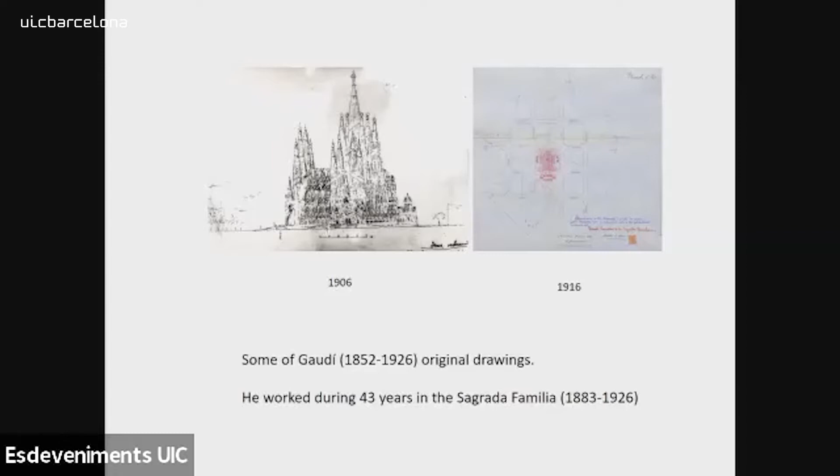He defined the building's general design through drawings and descriptions and set out the construction program so that he himself could turn the endless possibilities into reality by building one of the three facades, the Nativity facade.

In this way, he invited future generations to do the same on other parts of the building, which he specified in the form of drawings and large plaster models.

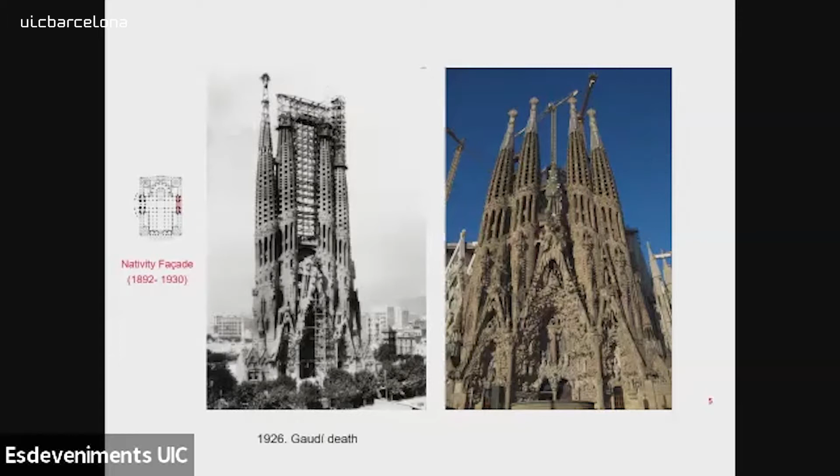His disciple successors built the towers of the Passion facade, while the interior nave, the crossing, transepts, and the apse were built between 1986 and 2010 under the direction of Jordi Bonet.

Over the past several years, we have worked to complete the sacristy, and now we are building the six central towers, the first of which, the Mary Tower, was finished last year.

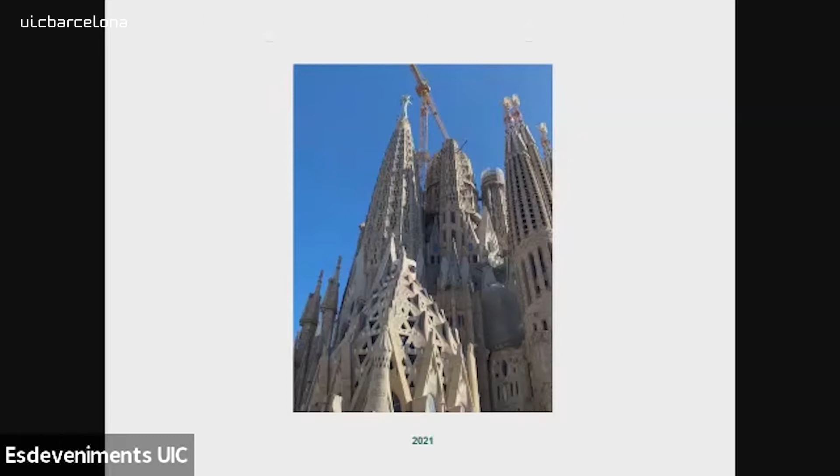The process of turning the plans of each part of the church into a concrete reality has always depended on the information of Gaudí's original plan. When we have the original plaster model or detailed drawing, the process was to study in depth before building, to understand the laws and method of design that were to be used in other similar parts of the building.

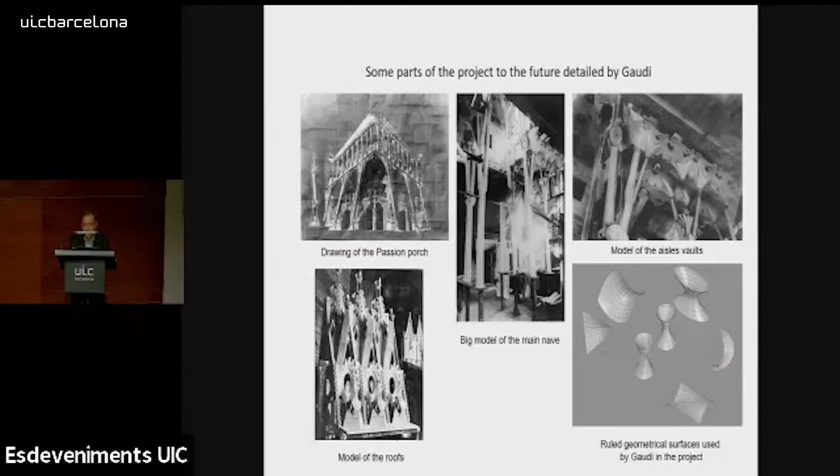Computing technologies have been a very important tool to make the entire process possible, above all because he designed the project to be built in the future only with geometries that exist in nature, but which no architect had used in their projects before.

Making detailed models based on rules and the same method was the system that Gaudí created to transmit the detailed design which he intended to communicate to his successors. He proposed that the rules and the design method of the plaster models could be applied to other similar parts, defined in his drawings and descriptions, but not detailed in models.

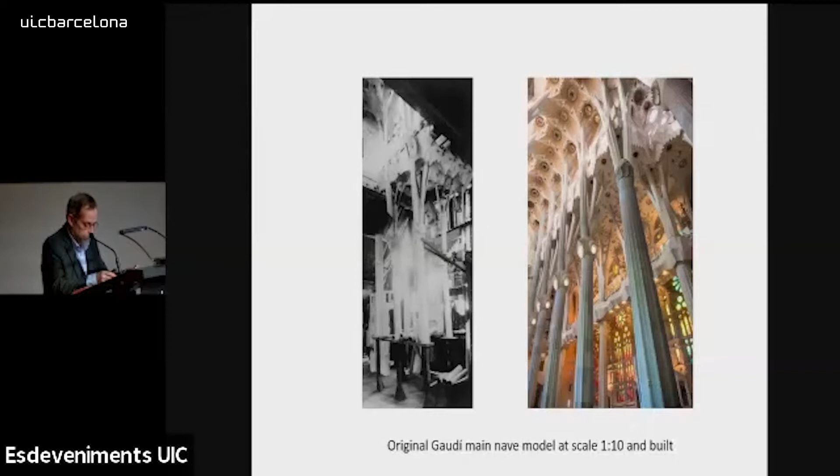Building the Sagrada Familia has always been a challenge. Today, it necessitates the use of the most cutting-edge design and construction technology, which has required analyzing and learning what contemporary technological construction can give us to build the Gaudí project.

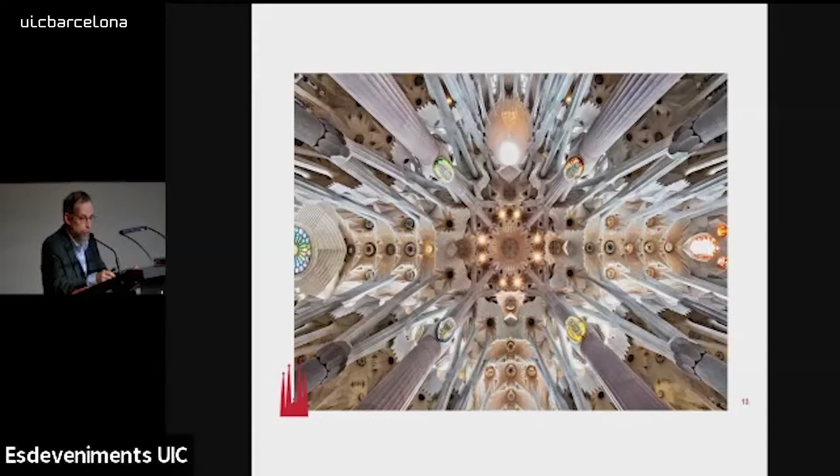In turn, contemporary technology, and I am speaking principally of digital technology in relation to drawing and structural calculation, has contributed immensely to new qualities and developments of the project.

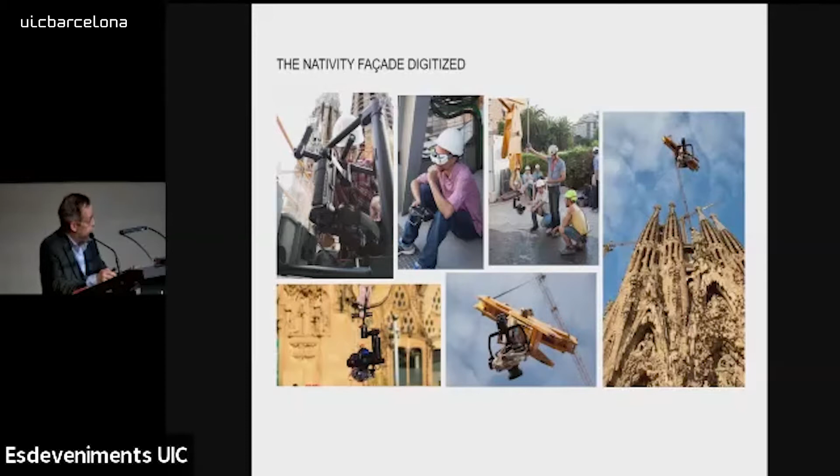The new technologies also assist the task to preserve the heritage. The Nativity facade has been digitized with a scanner and photogrammetry, obtaining 2 millimeters of precision.

First part, the study of the original Gaudí project today. We have the data of the original project in different forms: in published drawings, in the original models, the models restored after the destruction during the Civil War, photography of the original models, the pieces conserved, and also in word descriptions.

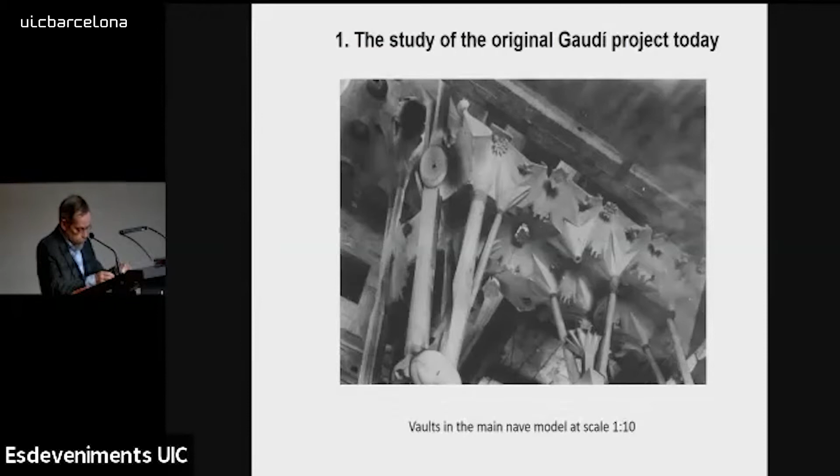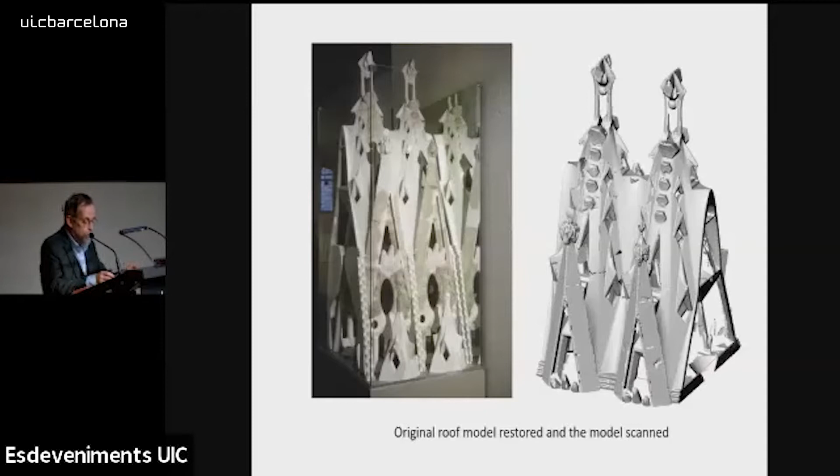Gaudí left a model of the glory facade, the main facade. The pieces scanned were built virtually. The digital photography restitution allows us to analyze the photograph of Gaudí's original models and to complete the information of the remaining fragments of the models.

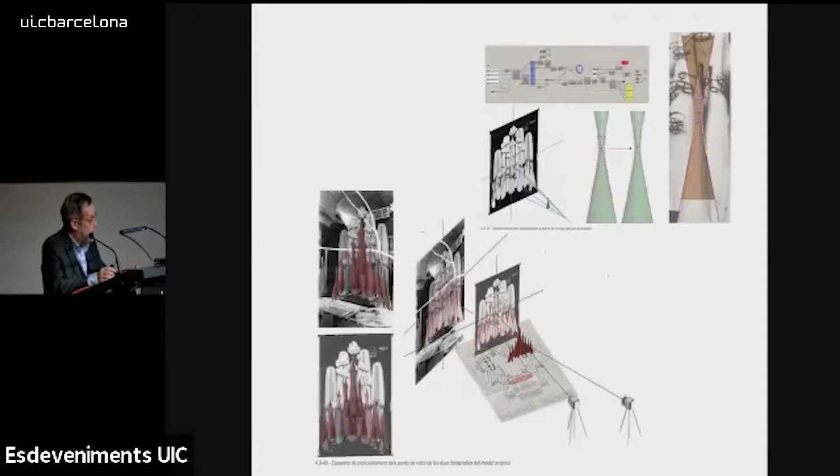We can thus obtain the proportions and dimensions of the geometry and be as faithful as possible to what Gaudí had proposed.

The printed 3D physical models, also with plaster like the Gaudí models, is the verification of the digital models. We print physical models for the verification of the digital models. This information is completed with virtual reality.

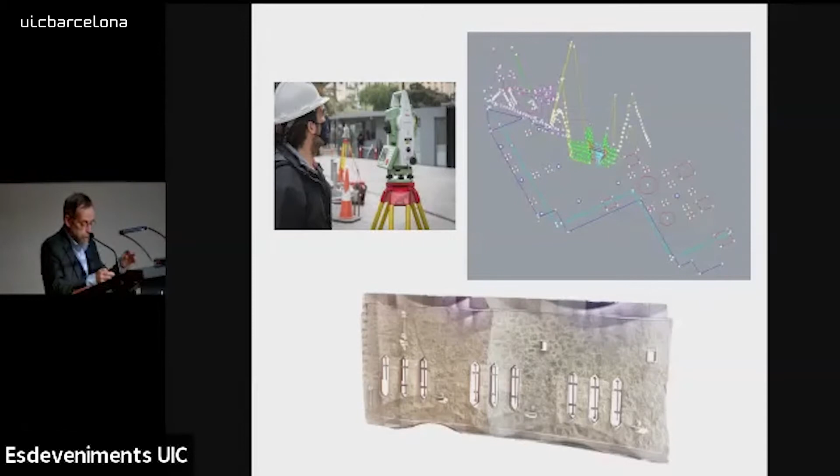During the construction, topographic digital systems allow us to control the situation of the elements already built and the correct placement of the construction elements.

The central towers, example of parameterization. The project of the 6 central towers: the central tower of Jesus Christ, the 4 Evangelist towers, and the Mary tower above the apse.

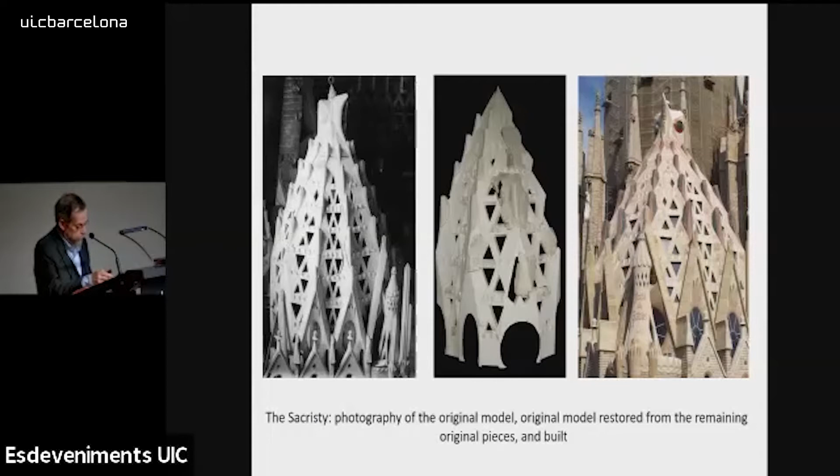The 6 towers located above the walls of the crossing and the apse are related to the dome of the sacristy, which Gaudí left in a detailed plaster model. The sacristy was a testing ground for the towers, both based on the same concept: the intersection of

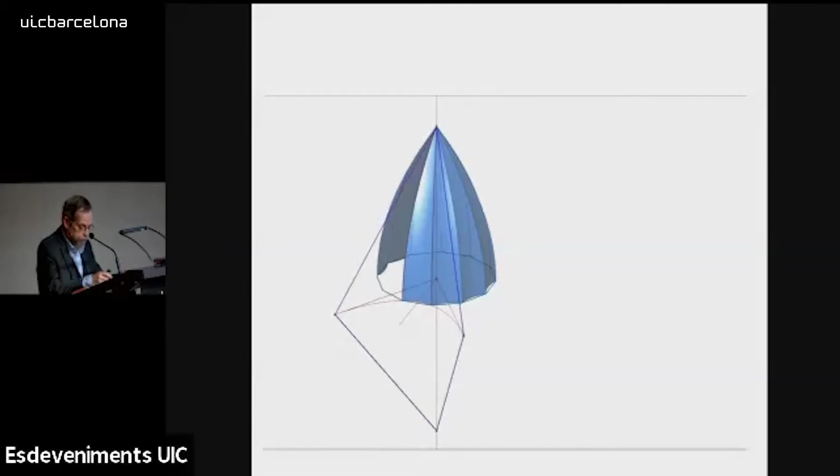paraboloids joined by a common vertex at the top, a very resistant structure. Both are the result of intersecting hyperbolic paraboloids: 12 for the sacristy and also for the Tower of Jesus Christ, the highest.

14 for the Tower of Our Lady, the Mary Tower over the apse, and 8 for each of the 4 towers of the Evangelists.

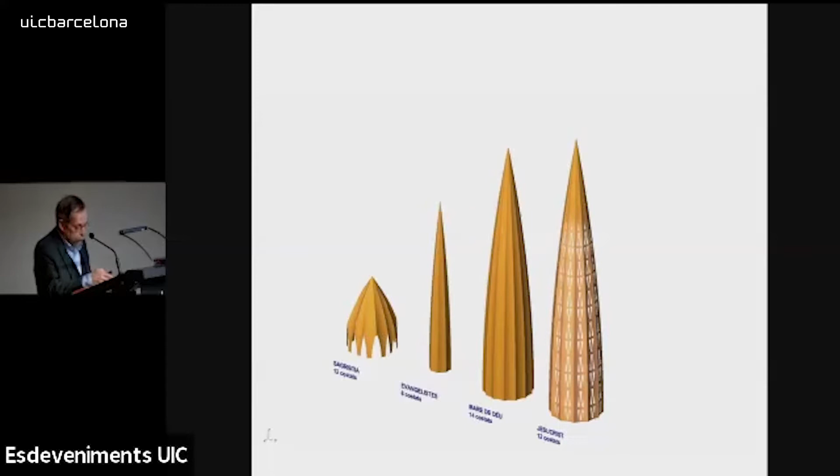In this way, the same geometrical composition of the sacristy is adapted to the diameter and the height of each of the towers.

At the intersection of the hyperbolic paraboloids on the exterior, raised edges emerge from the cupola, emphasizing the parabolic form that rises up to its crown.

Triangular windows follow the lines which generate the hyperbolic paraboloids. The process of working was to apply the laws of the original model of the sacristy cupola to the central towers with a parametric informatics program.

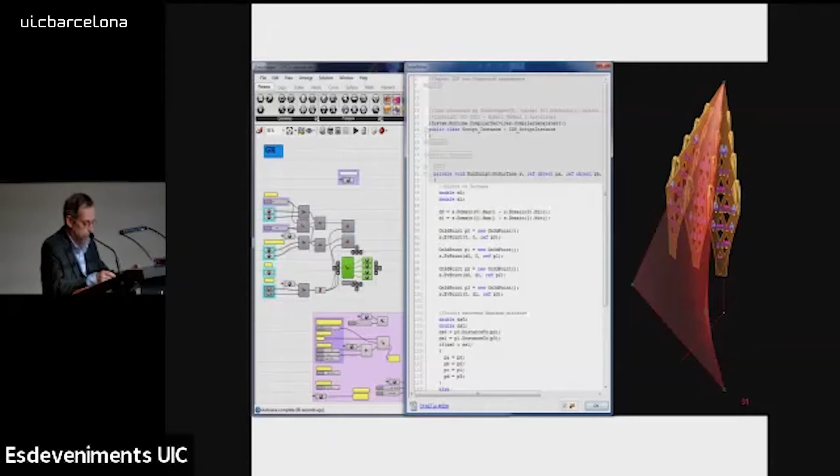The stone of the Nativity and Passion facades is sandstone from the mountain of Montjuïc in Barcelona, which came in different colors and shades. However, the quarry of this very high-quality stone is now closed.

For this reason, we have collected stones from different European quarries of the same kind, but with different colors or shades. With a random drawing obtained by a computer program, the stones have been arranged in the tower surfaces to obtain similar effects to the Nativity and Passion facades.

Central tower, that is an interesting question. Today's technology allows a new structural and construction system and offers new spaces.

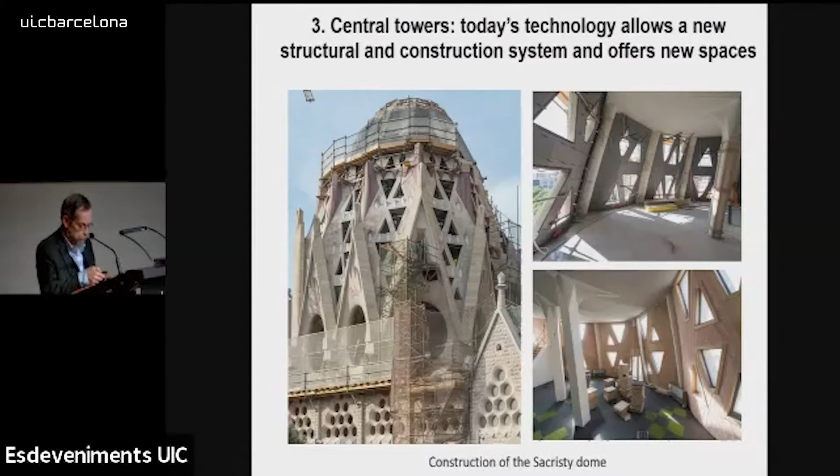In the towers, we also wanted to build with large panels, but we wanted to empower the stone as a structural material. Gaudí planned to build the towers with 12 slabs of floors in order to support the exterior surface, as in the sacristy. We imagine concentrating the structure of the towers only in the exterior surface, without the floors. The sacristy floors contain different functions of use, but nothing was planned for the floors of the towers.

We followed a process of design that led us to the definitive solution. Firstly, after the structural calculation, we planned mixed panels of stone and reinforced concrete supported by a steel structure of vertical and horizontal steel beams. After, second, we studied the diagonal steel structures.

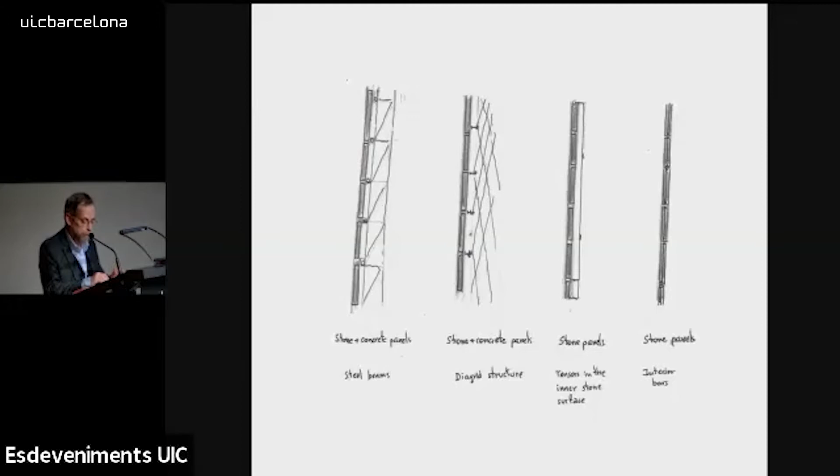The team of architects from our office, the architect collaborators in the structural calculation, 2BMFG, and the London office of Arup, decided on a new technique, tensioned stone, with a structure of steel profiles and reinforced concrete in the corners. With this possibility, we were able to recover the structural function of the stone.

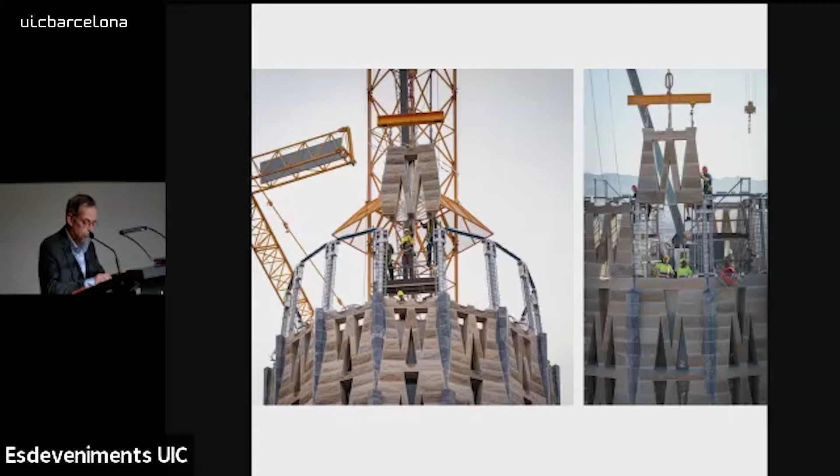First of all, we studied the structure with inner tensors, and finally, with interior steel bars that allow a compression of the coursing stone when the two heads were tensed. This technology allows us to build large stone structures with very little thickness and to build with big panels. On the other hand, the overall structural system allows free monumental spaces inside, two spaces of 60 meters height in the Mary Tower and in the Jesus Christ Tower.

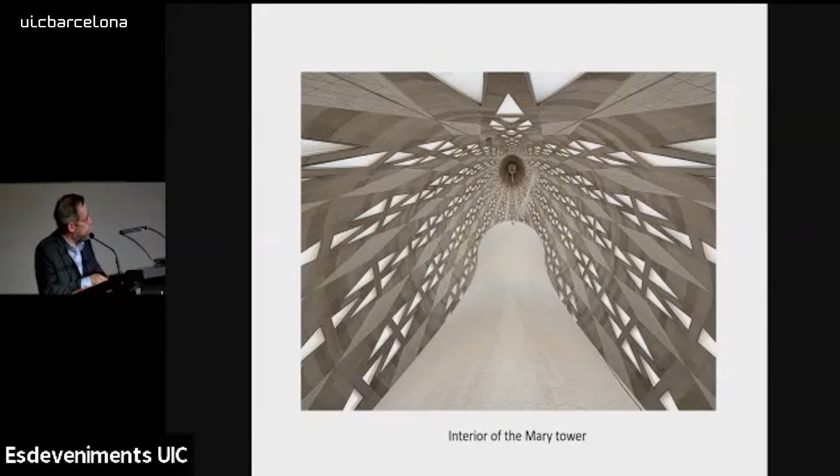The arboreal structures of the naves, built with stone, precast concrete pieces, and reinforced concrete of high resistance, support the 6 central towers.

A new column, the column of double helicoidal turning, generation laws as a project method. I will explain only two or three columns as examples of the system, the column that Gaudí designed in the nave. Studying the original model at the scale of 1 to 10 of the main nave helped us not only to build the main nave, but also allowed us to discern the laws of structure, geometry, and composition that would help us to design the nave of the crossing and the apse.

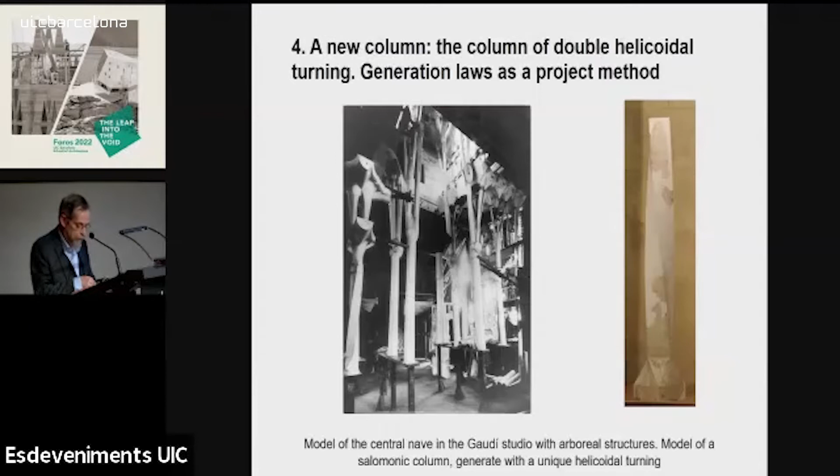During the last 14 years of his life, Gaudí created a new kind of column in order to dress the columns of the arboreal structure with geometrical and natural forms that give continuity between the branched columns. He created a column that is the intersection of two helicoidal columns with the same base and with an inverted helicoidal turning. The simplest one is the column with a square as its base. The intersection of the two helicoidal turnings produces the transformation from the square to the octagon. The column is the intersection of the two helicoidal turnings.

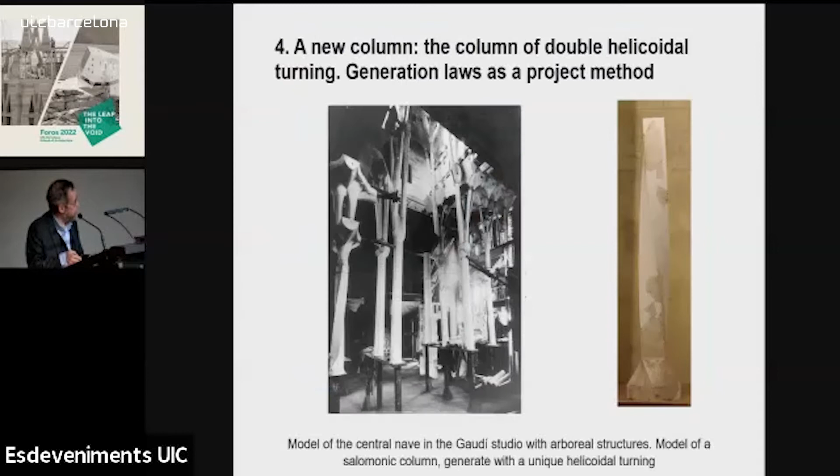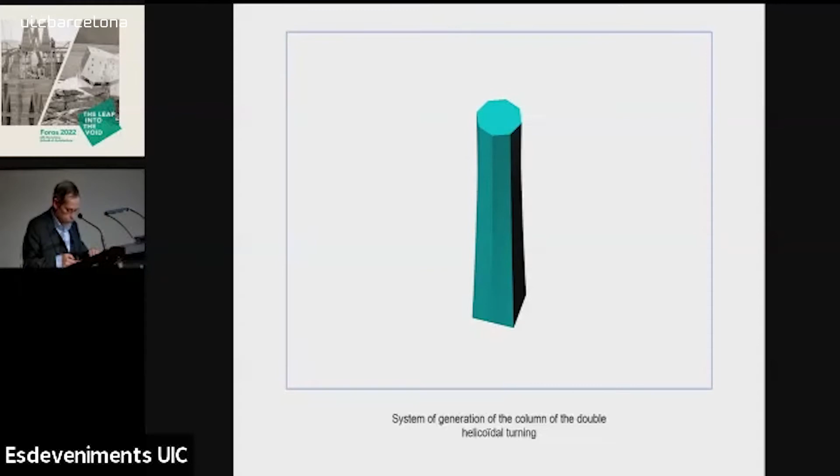And after, we can repeat. There's the first helicoidal turning, the second helicoidal turning to the other side, and the column is the intersection of the two helicoidal turnings, in this case the transformation from the square to the octagon. And after, from the octagon to the 16-side polygon, the 32-side polygon, and ultimately to the circle with infinite turnings.

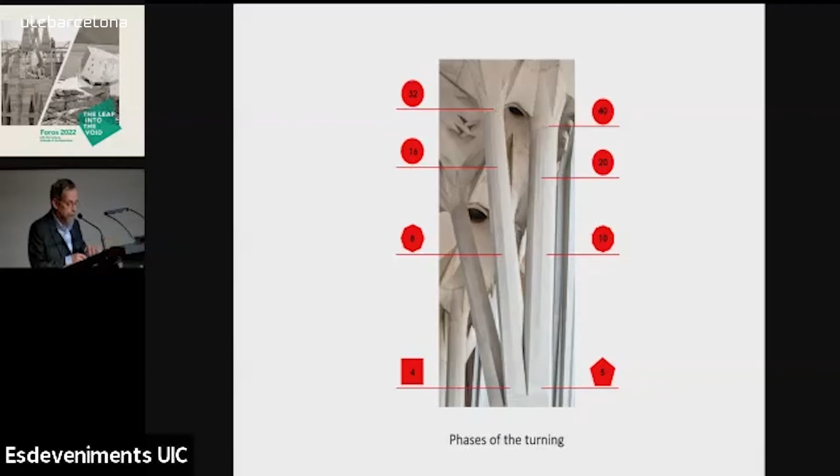For example, the base could be a square, but could also be a pentagon, a hexagon, or a composition of polygons. With this system of generation, it is possible to create infinite columns. With this type of column, Gaudí joins the different columns of the branched structures with continuity.

Rigorous application of geometry, together with years of knowledge acquired by the architects and the help of advanced 3D modeling software, have allowed us to remain true to Gaudí's models, interpreting them and extending and developing the solutions in other sections. For example, in this ramification in the crossing, 2 columns with hexagons at the base are joined by a column that is the transformation of the 2 hexagons to a square and to the circle at the bottom.

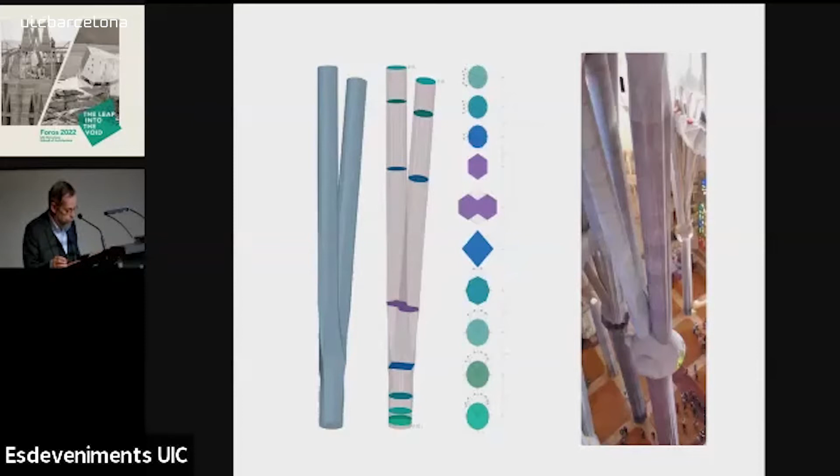Gaudí designed the type of column, the system and the method that we apply in new columns, using the advantage of the application of new design informatics programs.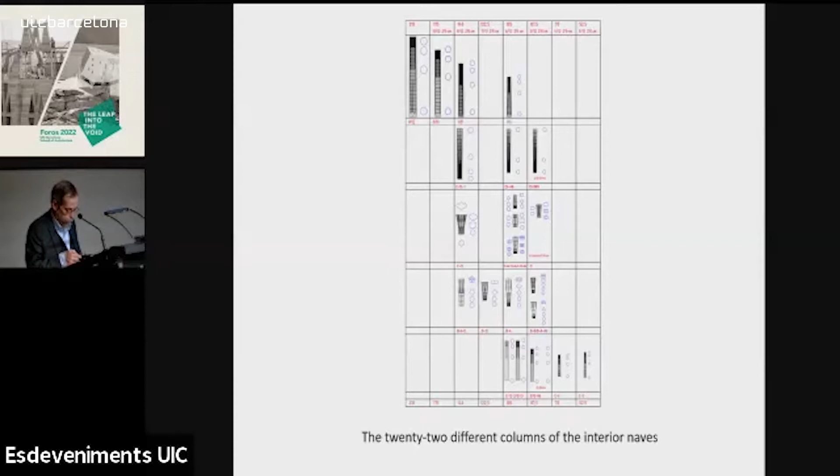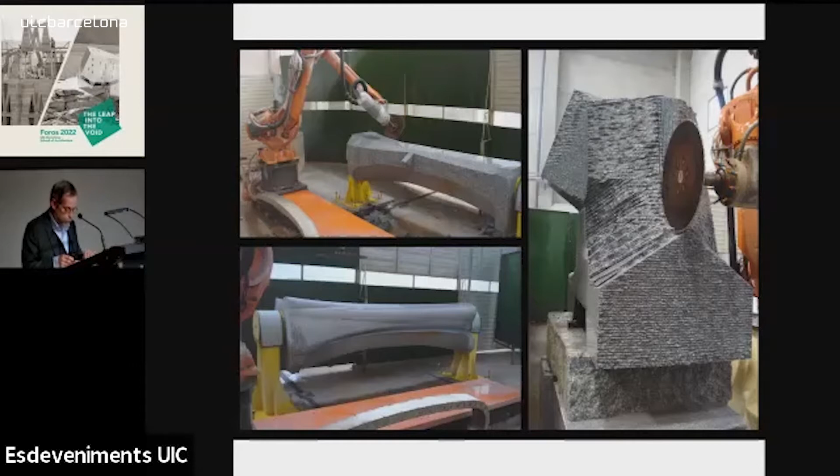The Sagrada Familia is a bench test for new technologies. For example, the first stone columns of the nave were cut in the 80s by using digital manufacturing following the intersection of the 2 helicoidal turnings with 2D digital movement. And two decades after, a robot cut the hyperbolic and parabolic columns of the Passion facade portico. The manufacture of stone pieces by robots allows us to cut complex geometries, gaining quality and speed, as well as improving the efficient use of the stone blocks.

The hyperboloid, skylights, lanterns, and pinnacles. In the third and definitive project of the Sagrada Familia nave, Gaudí introduced the one-sheeted hyperboloid, the arboreal structure of columns that collects the weight and allows space to open between columns in the ceilings and walls, with skylights using hyperboloids.

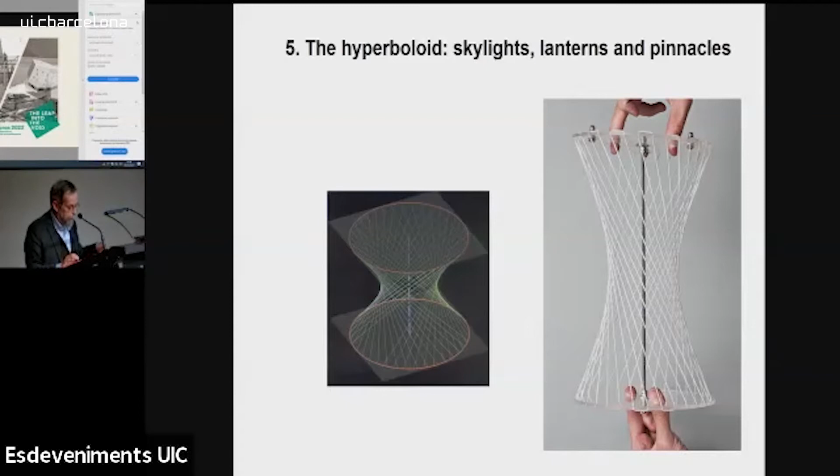The hyperboloids collect the upper solar light and direct it to the interior, diffusing it throughout. Moreover, the hyperboloids diffuse sound and allow the use of Catalan ceramic walls in their construction by placing the tiles, triangular pieces of trencadís, along the straight line directrices or generatrices of the geometry.

Computer drawings gave the builders information about the placement of the different elements, and they also know the laws of the geometry of the hyperboloid.

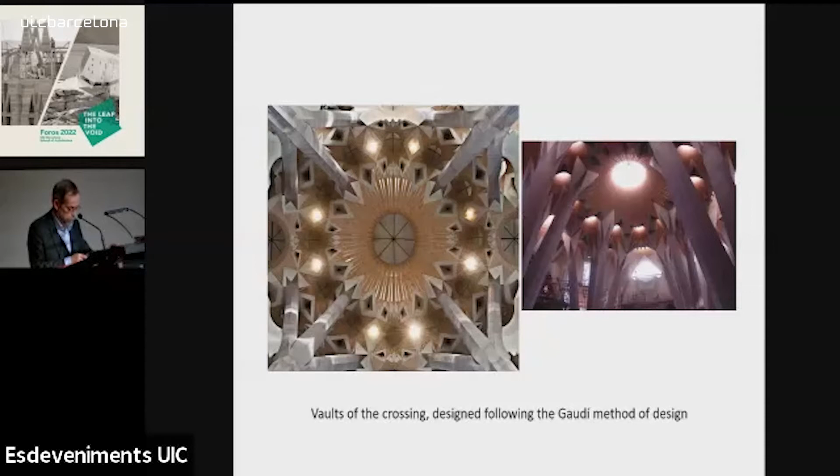Probably Gaudí was so fascinated by the hyperboloid, by its forms, design, and constructive possibilities, as well as its acoustic and lighting features, that he used it profusely in the future project of the Sagrada Familia — to design numerous elements: skylights, capitals, windows, domes, the 16 lanterns of the Glory facade, column shafts, pinnacles, and bells.

He took advantage of the straight line directrices or generatrices in order to generate the definitive form of the hyperboloids, designing a very personal and clever method of work and design that could be executed.

In the walls, Gaudí cut the infinite surface of the hyperboloid with another hyperboloid. After that, he typically limited the surface of the hyperboloid with star forms, using the straight line generatrices or directrices. Any point on the surface has two straight lines passing through it, rotating in opposite directions.

These lines are tangent to two sides of the circle at the center, collar, or neck of the hyperboloid. These straight lines, along with other similar ones, produce a pointed star limiting the surface of hyperboloid number 3.

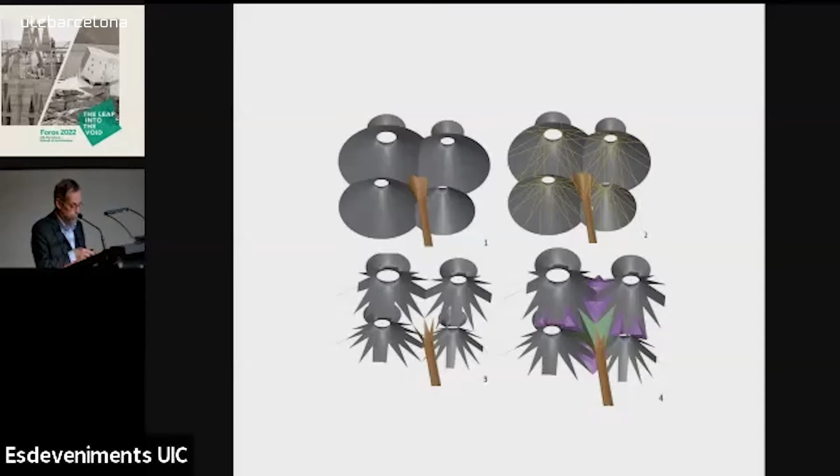This is the key to Gaudí's use of hyperboloids: the creation of star forms using the directrices, the straight lines. If he wanted to join two hyperboloids in walls or windows, he created star forms from points of the curved intersection of the two hyperboloids.

Afterwards, he joined the two straight lines of one hyperboloid to the two straight lines of the other with a paraboloid or two planes, which fill the spaces between the hyperboloids and join them, enabling continuity — always the same, to find the continuity.

The openings in other elements, such as lanterns, designed to collect sunlight, are also designed using the straight lines of the surface, some clockwise and others counterclockwise, creating rhomboidal openings and windows.

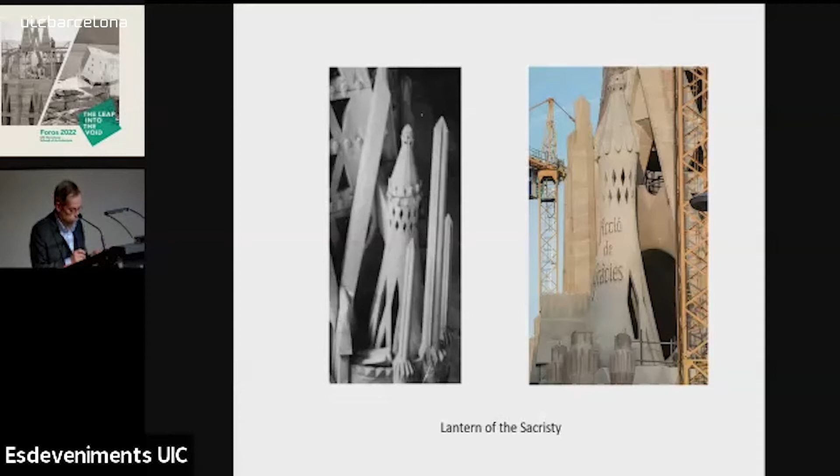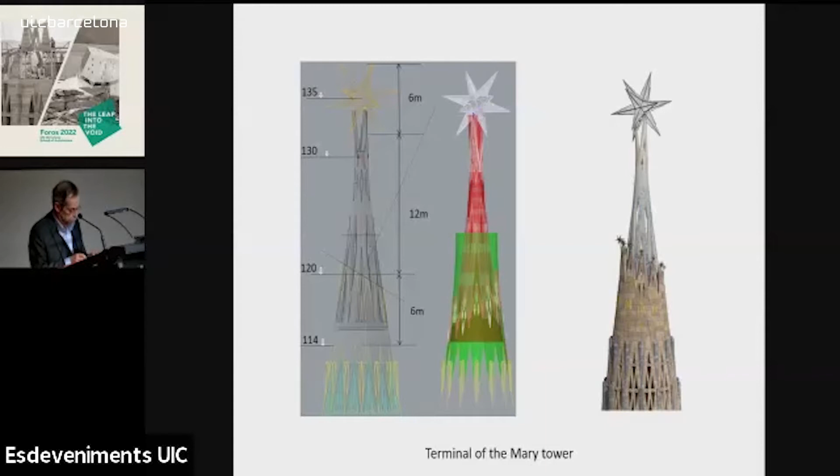Following Gaudí's ideas, a big glass star sits at the top of the Tower of the Virgin Mary in the apse — a starred dodecahedron. It's supported by a slender 18-meter-high hyperboloid of reinforced concrete covered with blue ceramic pieces of trencadís.

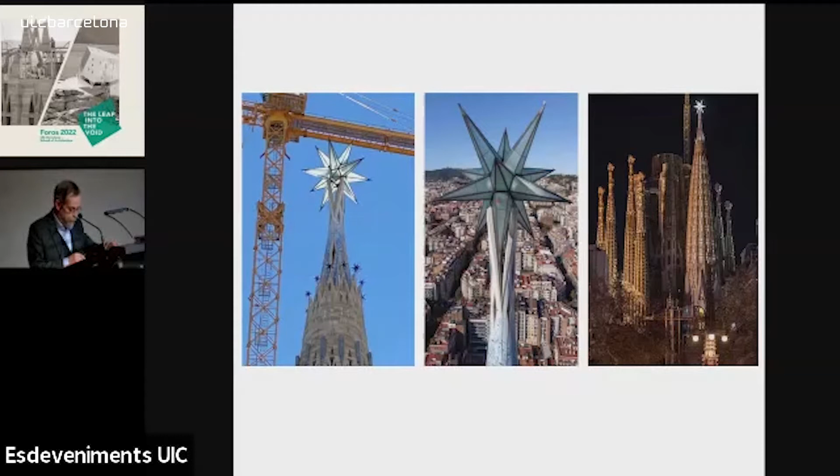The hyperboloid has 12 sharp starred points at its tip, generated by the hyperboloid's straight lines. These star points support the glass star resting gently on top. Gaudí wanted the upper star to be bright, so it is made of glass with points of light placed at its center, or nucleus.

To finish, prototypes and pre-assembly of construction elements. On the Nativity facade, Gaudí positioned life-size plaster models of the sculptures to see the effect, then gave them to the stonemasons to construct in stone.

Still today, we make full-size prototypes of many of the new elements. A prototype allows us to gauge any technical difficulties we may face, and when taken to the actual site, gives us an idea of the effect it will have both from a distance and close up, which helps our decision-making on the definitive project.

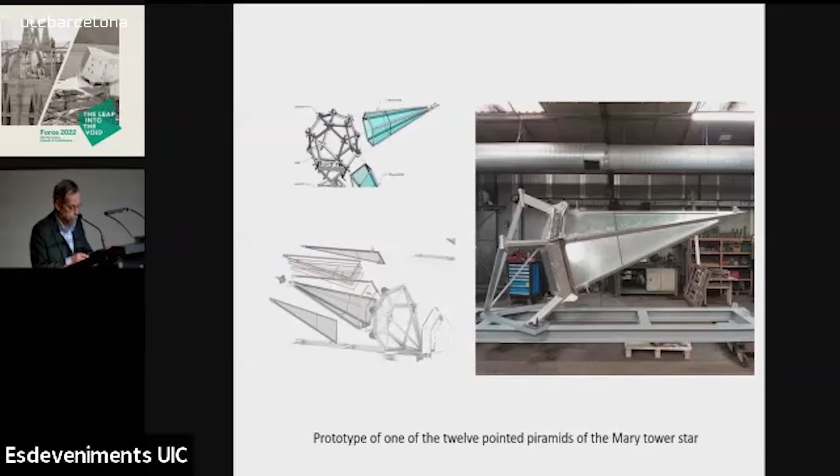For many years now, we have been pre-assembling the large construction elements in their entirety at a workshop outside Barcelona. We have assembled structures measuring 20 meters in diameter and up to 18 meters in height — formwork, steel structures, prefabricated stone and concrete elements, and large pre-assembled stone pieces, which are then transported to Barcelona once all the pieces are well placed.

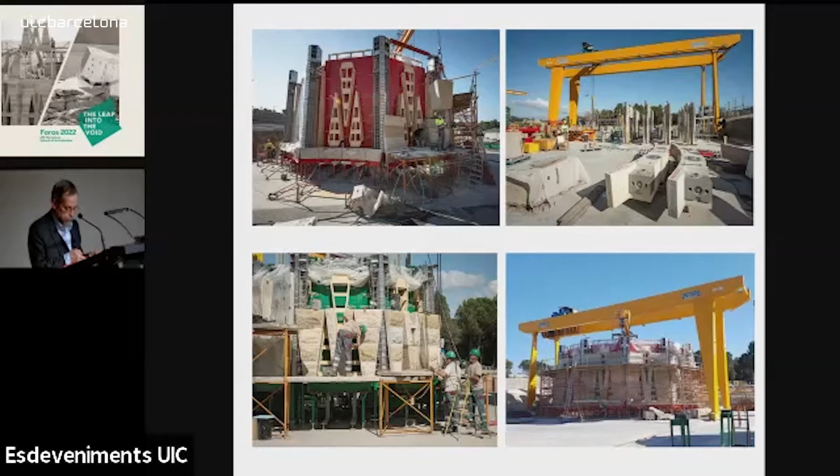This system allows us to place the pieces at ground level pre-assembled, ensuring they will be fitted efficiently when brought to the site in Barcelona. With this previous complete assembly, the building process in Barcelona is more effective, safe, and accurate. In addition, digitalization of all the elements of the project allows prefabrication of off-site components and improves the quality of the elements and the speed of placement.

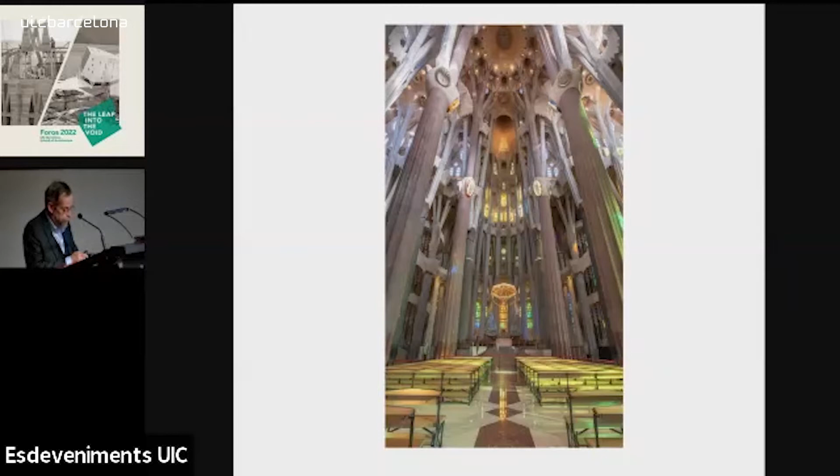The 19th of this month will mark 140 years since the first stone of this expiatory temple was laid. Over the years, people's contributions and new technical possibilities have made construction possible, allowing us to meet the challenge set by Antoni Gaudí in his project, respecting also the current structural, climatic comfort and safety requirements. Thank you.

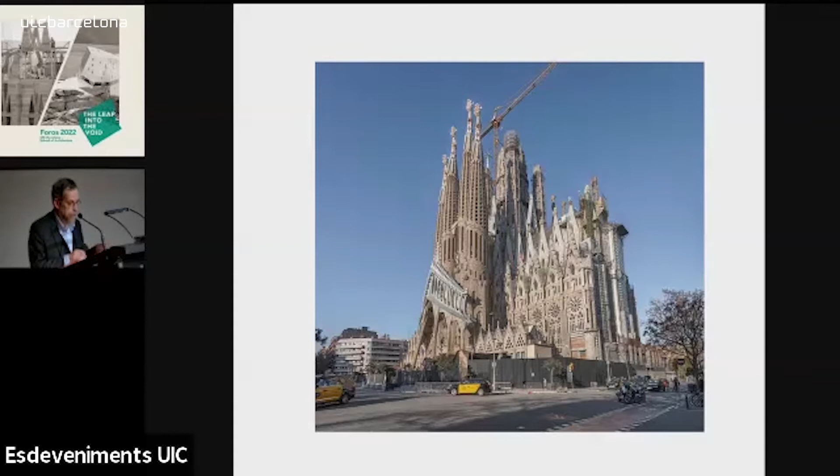Thank you, Jordi, for this wonderful lecture. I have listened to many presentations from Jordi Fauli, and it's incredible that every time he explains something, it's like the first time I've ever heard it. So it was a presentation specifically for us, and I'm really thankful. I was very impressed by that.

He talked about the parameterization of the geometries, how this has been achieved thanks to our research and a reconstruction of the original models. He talked about the materiality with this combination of stones, about the geometrical composition of towers and sacristy, which are like a kind of parameterization. He talked about the evolution from Gaudí's project and how the panels are conforming. He also talked about the interesting, amazing double helicoidal turning and the hyperbolic geometry. And finally, about the prototypes and pre-assembly elements, which is the way everything is carried on. Thank you, Jordi, for this lecture.

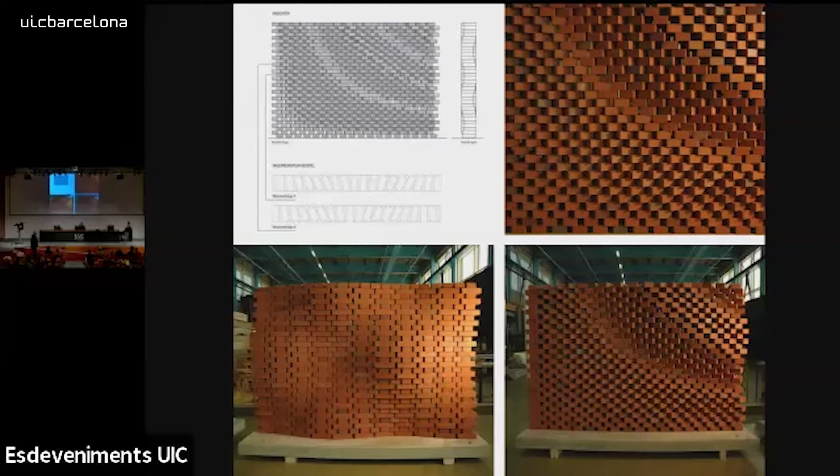It's important, 2006 is an important number. As you see, it's a parametric design, here firstly dedicated to the control of airflow and light. And the more value is that we had fun producing patterns of huge wine grapes in a box by turning the bricks in a way that the shadow creates this kind of picture on the facade. And at night it is glowing because the light is coming through the bricks.

So this was the pushing moment when we said we have to introduce our students from the first moment towards the ability to use these technologies, because it's something that will be important in the future, in education and also in our job. When we want to have experienced students, then we have to train them.

So in the first year course, I have always around 350 students starting every year. It's a huge number, but we start with them. Here in the center you see my very smart assistant professor, Jonathan Benamu. He does the teaching of the first semester. We introduced Rhino; in the second semester we introduced ArchiCAD, not to do the plans—that's the boring thing—but to learn to model in 3D directly.

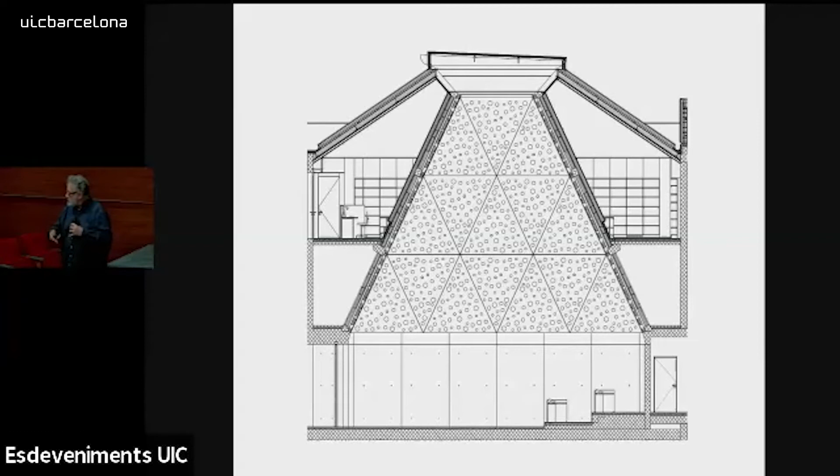So for that reason, we also started in our office to say, let's use this technique where it makes sense. Not always, you have to decide where it makes sense or less sense. But for example here, this is the Federal Court in Bellinzona, an extension of an existing classical part of a building, where we wanted to construct shells for the court hall. Shells prefabricated, this time not in masonry, but in reinforced concrete.

Doing elements that allow, again, parametric design, here dedicated mostly to the question of acoustics, to have the control and the right degree of absorption, the holes that allow to absorb the acoustics, and the forms, this kind of mountains, is to control the diffusion.

This is the main goal, but by the way, it's for sure that you see more or less it looks a little bit Baroque. So it's not about forms firstly, but it's what can be the more value as well, like the wine grapes that we used in the winery.

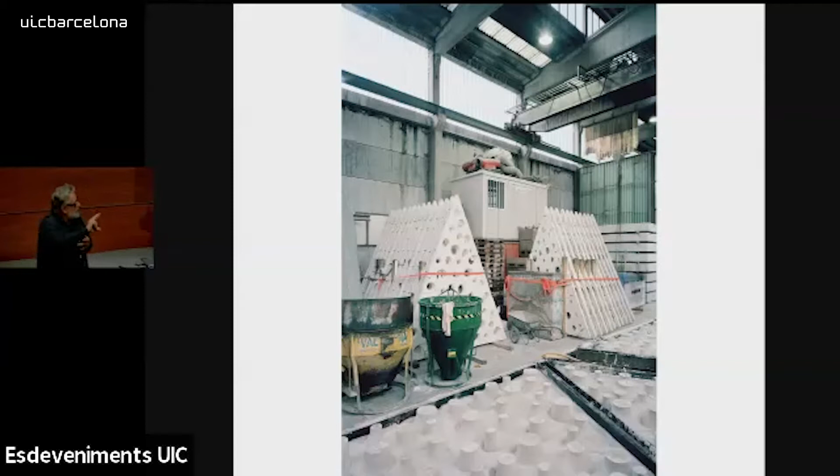So this kind of prefabrication allowed us - we did only one pattern for one module, but it allowed us to turn these elements from the base to the top, and combining it, as you see, the elements show what we call, what the French call rapport, on fait un rapport. This means you can jump, let's see, yeah.

The joints are connected by this form, so it looks like a whole integral shell construction. And what is amazing for us there is, it's not only cladding, it's an integration of everything. It is a structural shell dedicated to the structure, the parallel construction, as well as the finished surface of this hall.

It's not a cladding. Normally for acoustic reasons, you have to do something soft in the end to cover, because acoustics in the end is really the main problem for every big room. But we wanted to have this kind of concrete surface and not the cladding. Only to give an explanation to this approach.

Okay, we continued with the students because we found out the students are very interested to step in somehow more close to, let's say, that what we call practice. And we did something like a small architectural office. We called it the Master Studio Monterosa, where we had 14 students. I had the chance to pick more or less the best that I could find in the ETH.

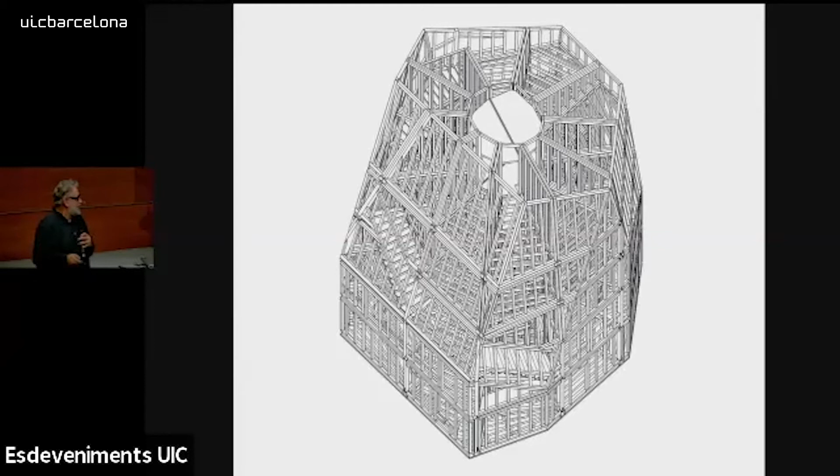So they had to manage this, and it was not only to do the drawings or the 3D modeling, it was to go in connection with the entrepreneur, to exchange the data. So we entered into what we call the digital chain, from the design directly to the entrepreneur and then to the machine, as we saw very impressively before in the works of Jordi Fauli.

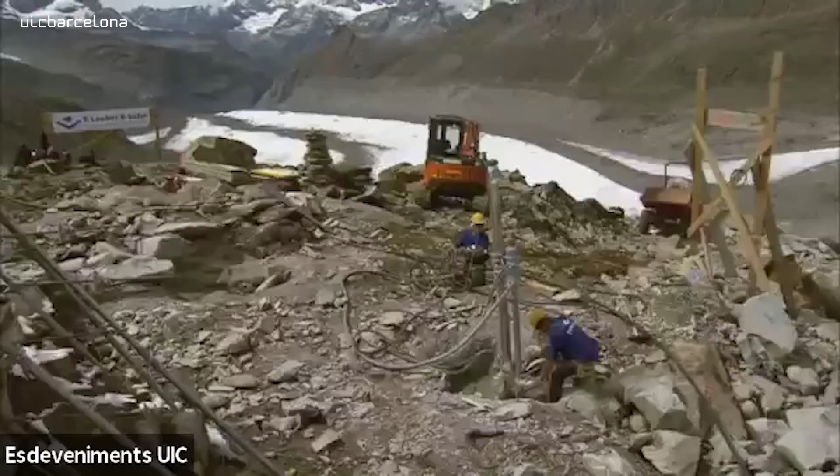The rock is hard and time is short. The construction workers install the concrete core and a series of sockets in the rock. The foundation must be in place before the onset of winter. Construction will then start next year.

12 days later on the site, and the concrete foundation has been completed. Now the steel construction engineers are at work assembling the steel grid, the actual foundation. The new Monte Rosa hut will then be built on the steel construction next year, using prefabricated timber sections. But before that, the long alpine winter will descend.

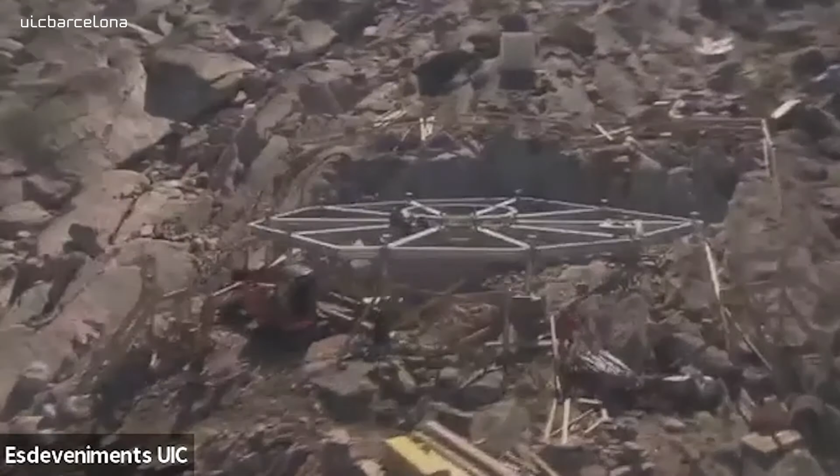Spring 2009. Master carpenter Egon Buhmann makes a visit, and site managers and architects for the new Monte Rosa hut exchange progress reports. On his computer in the office, Bruno Schacher draws the building elements of the hut, every single one. He receives the planning data digitally from ETH Zurich.

The Monte Rosa hut will be 5 stories high, built from 420 prefabricated timber elements. It will be almost self-sufficient in energy thanks to the very latest technology. Sustainability is the watchword, from construction to operation.

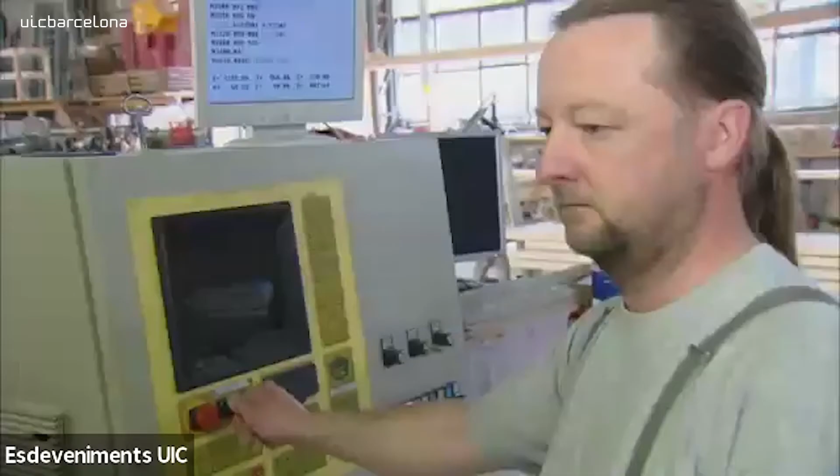The computer sends the data to the machine. It simulates the cut, quick check, then produces the element from Valais spruce, accurate to the millimeter. Production has been running at full speed since the beginning of March.

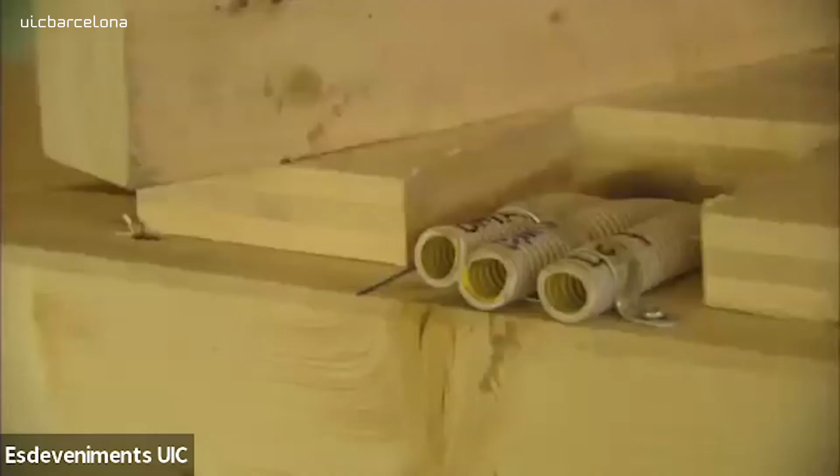Floor and wall elements are assembled and lined with insulation mats, and pipes are laid. Getting the materials to the building site and assembly will place heavy demands on logistics, and the weather has to cooperate. Still 4 weeks to go before construction can begin. The construction workers are optimistic.

The building site presents itself in early morning light. Day 2 of construction starts. Here is the star-shaped steel grid that will form the foundation for the timber construction. Yesterday, the builders cleared the site of 2 meters of snow. Today, the timber elements for the basement will be flown in and assembled. Everything must go quickly. Time is money.

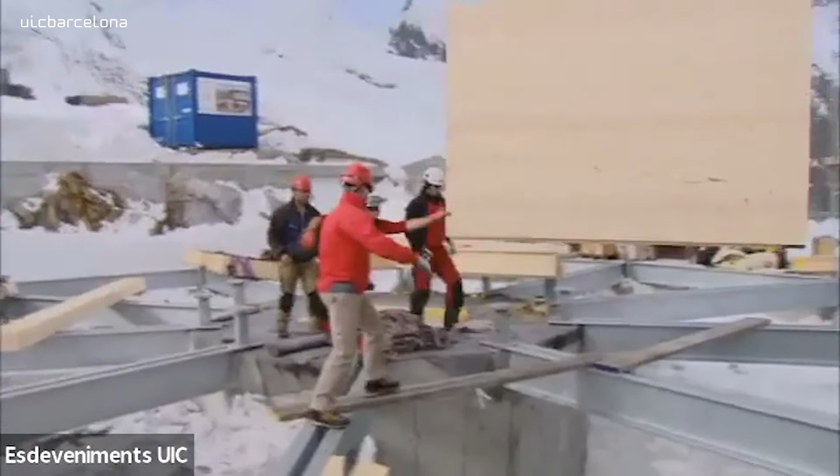Every 9 minutes, the helicopter takes the floor elements from Riffelborden to the building site, each one weighing more than 400 kilos. Like the pieces of a jigsaw, they're fitted precisely into the steel grid.

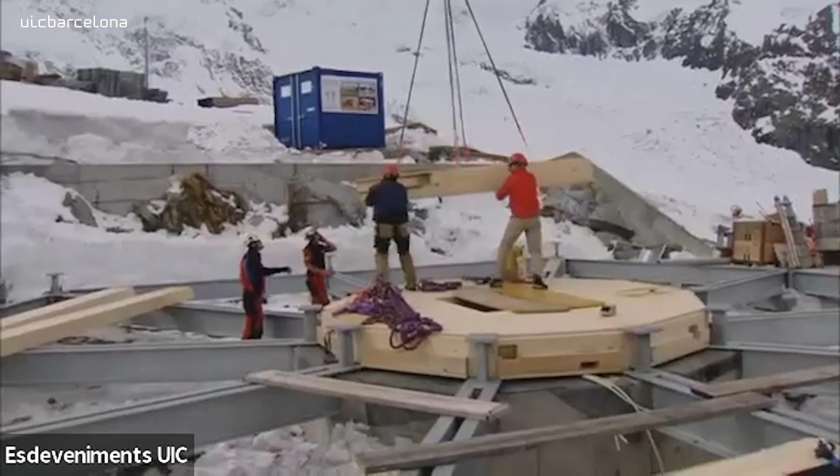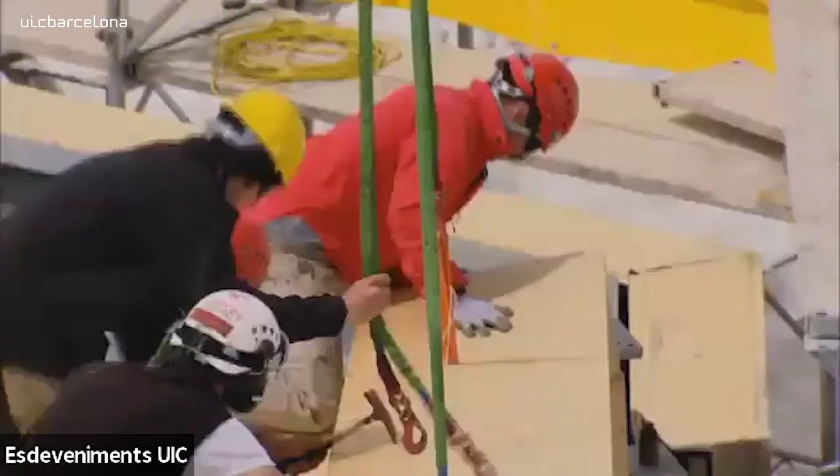By noon, the inner circle of the floor has been laid. In the afternoon, the helicopter brings the outer floor elements. Cooperation between the carpenters, pilots, and flight personnel is perfect. It's tough precision work at almost 3,000 meters. At 4 o'clock, the last of the 20 elements has been placed. Foreman Martin Bornet checks the measurements.

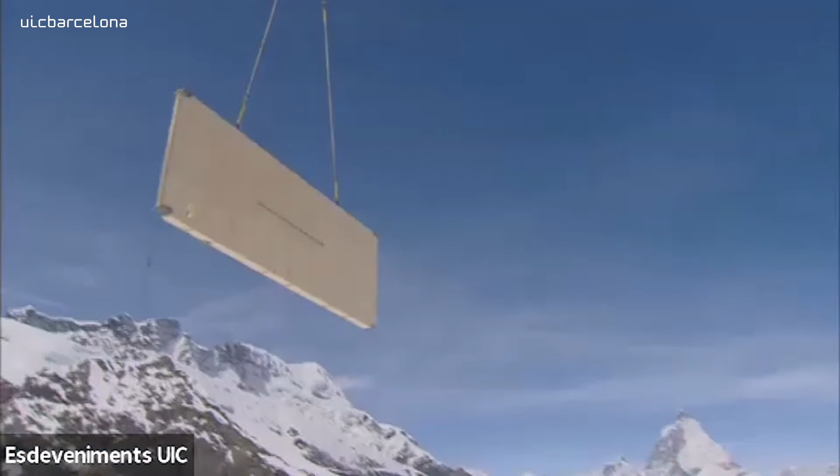Then at 11:30, the K-Max, a special helicopter for heavy loads, brings the first wall. Beneath the rope dangles 1,720 kilos.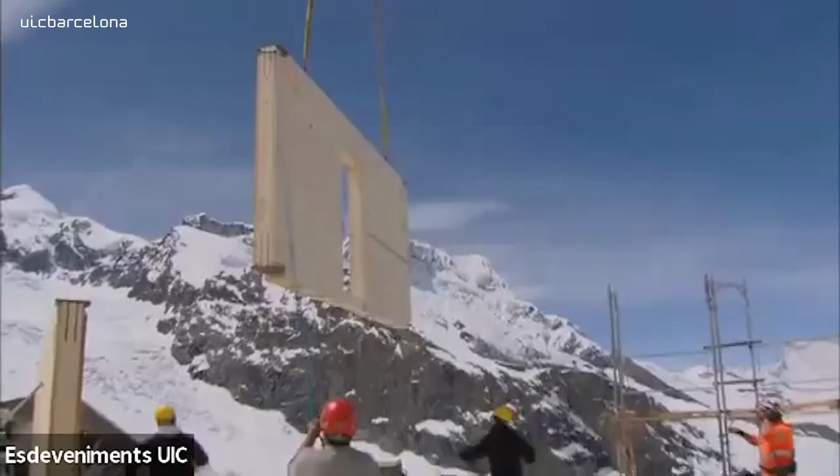Assembly takes 2 hours. At 1:45, the last of the 10 basement walls is finally in place. The basic structure of the Monte Rosa hut is up, just 3 days after construction began.

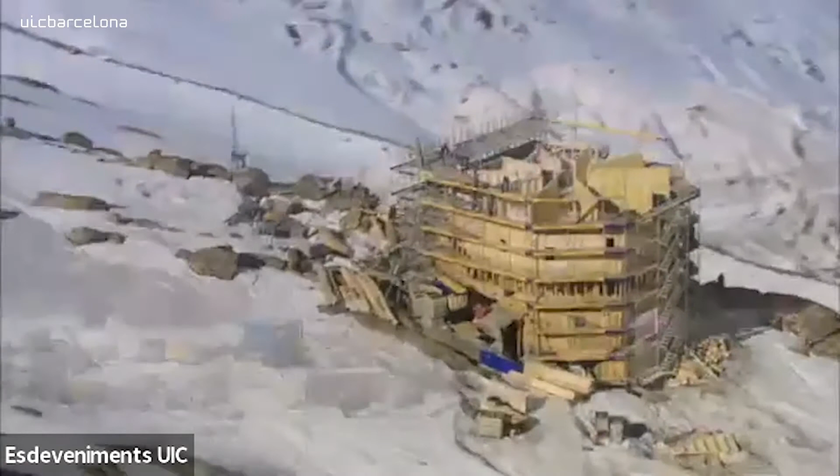4 weeks have passed since our last visit to the construction site. The workers have now hoisted 5 stories and the outer walls have been erected. Around 20 craftsmen are at work here now. Window fitters are now putting in the windows, specially made to withstand the raging storms that often sweep over the peaks up here.

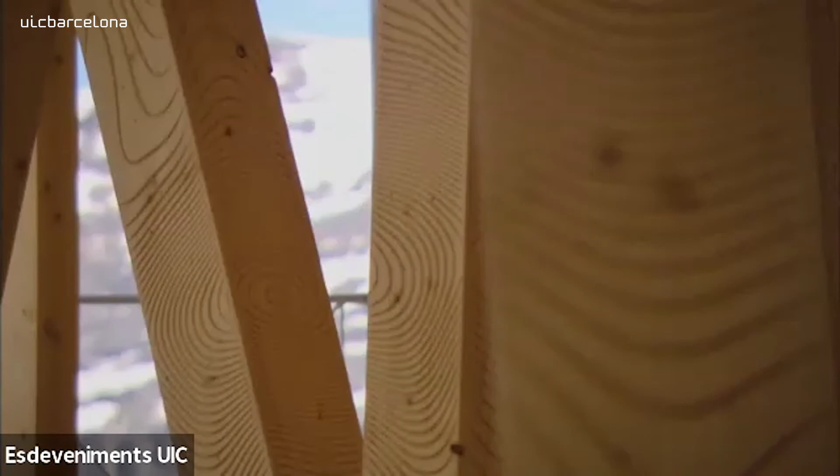The joiners are now working on the interior. The basic structure of the first floor cafeteria with its timber beams is complete. The row of windows that acts as a light and energy trap is also in place.

It's Friday morning at ETH Zurich. Andrea Deplazes and his colleagues plan the next steps. It's now all about the details, color scheme, door handles and carpeting. Andrea Deplazes and his team have produced the design for the new Monte Rosa hut with their architectural students at ETH Zurich. But what do they aim to achieve?

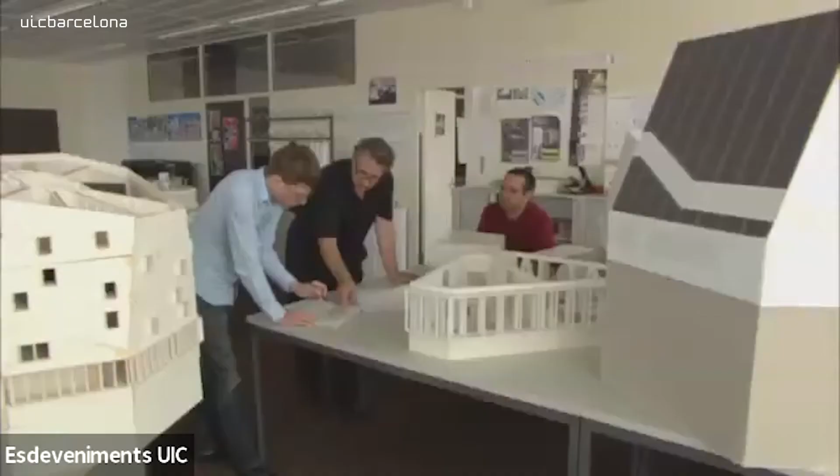And of course I'm certain, I'm sticking my neck out here, that it will be the best mountain hut that you have ever seen.

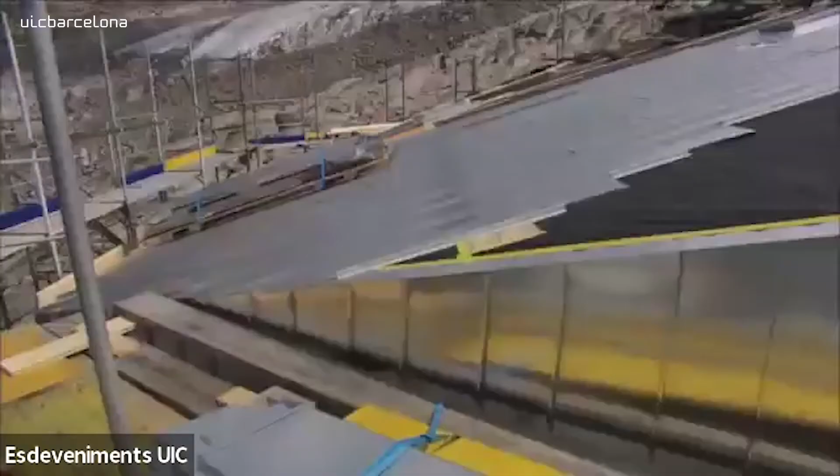The short mountain summer draws to a close, but there's still intense activity on the Monte Rosa building site. Metal workers add the facade, a demanding task. The protective aluminium sheathing must withstand wind and frost. And one day, it will make the building glisten like rock crystal.

The in-house power plant is almost ready. 100 solar panels on the south-facing facade will supply the house with electricity from sunlight.

Now the site manager has to be everywhere at once. It's true that everything is being done right now. We have more than 30 people working on the site. We are getting things ready for the painters, putting up fire-resistant paneling and preparing the kitchen for fitting. Doors and beds are being installed.

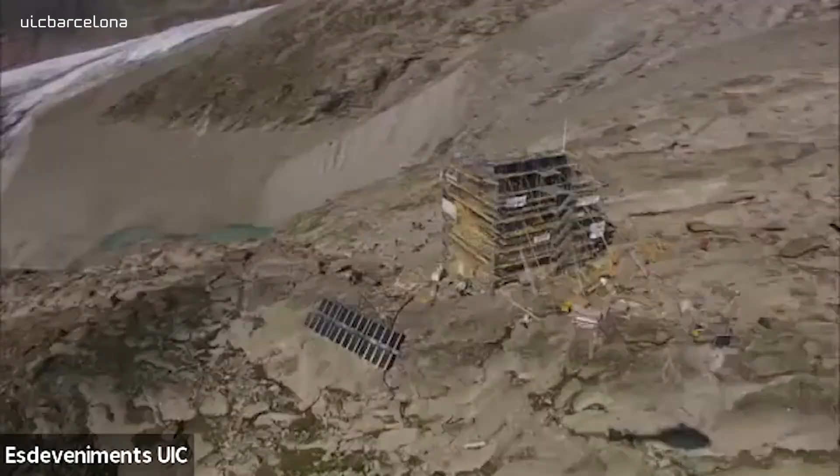It's the final phase. Dawn over the Monte Rosa Massif. The new hut is still in the shade of the 4,000-meter peak. The scaffolding was recently removed. It's 8 a.m. and the start of the last day of construction.

The terrace is still not complete. The carpenters fit the last planks. The final spurt on the building site. Only a few hours to go until the hut opens.

What's the last thing now for you to do? The very last thing is to clear up, clean and generally organize everything. And is it a success? Has everything gone well up to today? I haven't discovered anything wrong so far. I have walked through the building a few times already, but everything appears to be as it should be, according to the plans.

We also take a tour of the building. We take the cascading staircase to the upper stories. The washrooms - the hut has 14 wash basins and 4 showers. There are 18 rooms in the hut with beds for 120 people.

Still 29 hours to go to the opening. Work is complete. A sunny autumn day begins. The new Monte Rosa hut is complete and will be opened in 5 hours.

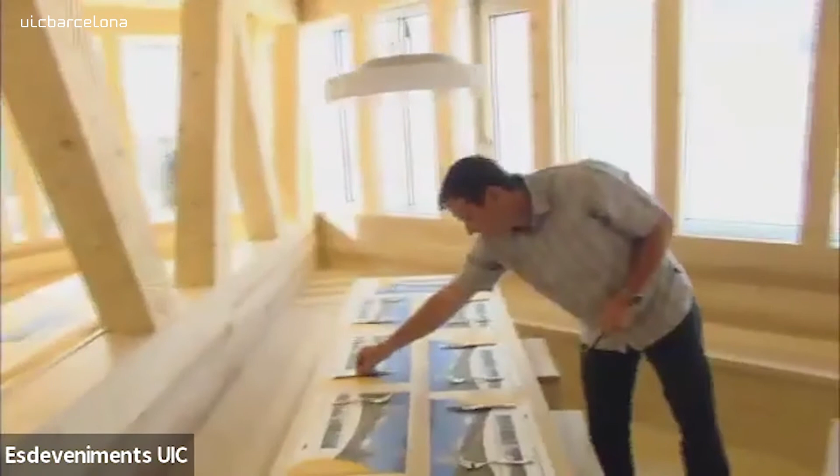The tables in the large dining hall are laid. Around 100 invited guests are expected to arrive in the afternoon and will be the first to spend the night in the new Monte Rosa hut.

This laboratory was financed with the help of sponsors who paid two-thirds of the more than 6 million francs it cost to build. Meinrad Eberle launched the project in 2005 to mark ETH Zurich's jubilee.

What does he hope to see the new hut achieve? I think we can stop here.

This project will motivate many people to come more often to the mountains and find pleasure in the world up here. It will ensure that the technologies in the building will be used in more projects. And I hope too, of course, that aesthetics...

He's not here. Okay.

The interesting thing for me was what was possible to do with students. All the projection was done by the students. I had the chance to choose two - the best student and my best assistant - who became project leaders. So we could work out the realization planning, which isn't possible to do to that extent in a normal semester course.

2012, six years after Gantenbein, three years after Monte Rosa, the ETH Institute for Technology in Architecture was founded. It grew from a small cabin and one robot into a very prestigious institution where many devices were assembled to test out not only technologies, but also what it's about: experimentation, doing new experiences and taking chances with new means.

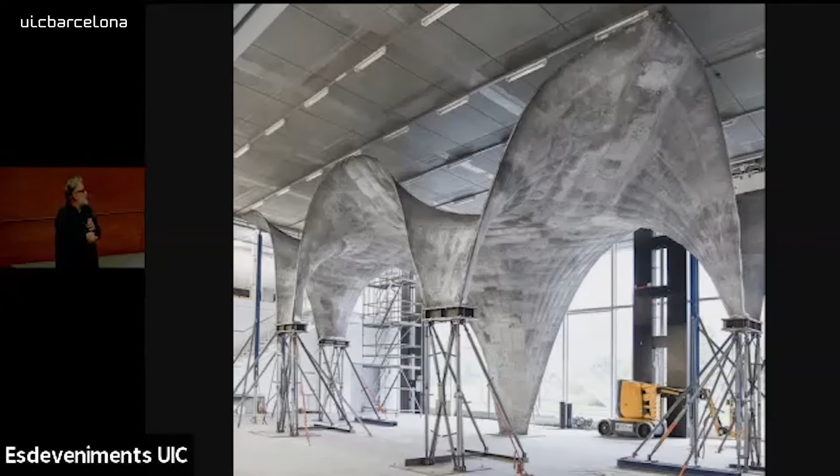So we see some works that came out in different scales and under different occasions, only to give an impression. Some structural works, others dedicated more to building physics, always under the title that we want to find out something.

It's not, and this would be the big misunderstanding, about optimizing industrialization in the boring sense of making things only cheap and quick and fast. So when you saw the film of Gantenbein, it would be a misunderstanding that the robot does the interesting work and the student behind is just feeding the robot, laying bricks toward it. This is important to understand - it's not in our interest to push that line.

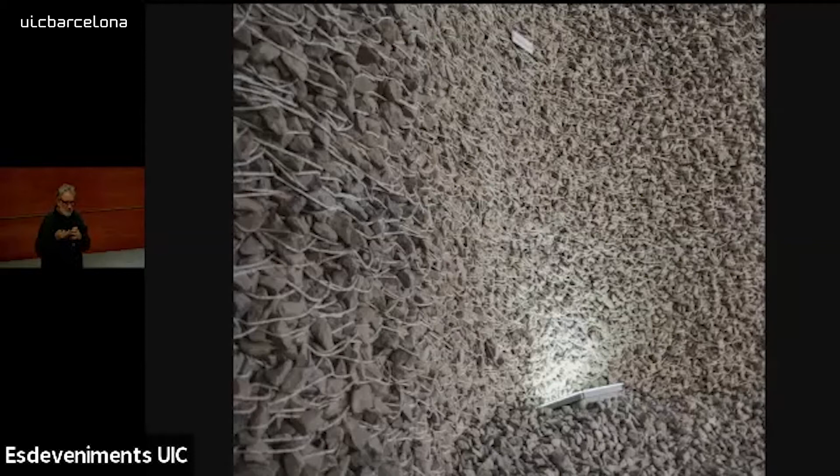So some applications, some strange things tested out - we have no idea, maybe it is something, maybe not. We will see, but it's open to test out. We don't want the students to have any pre-knowledge rather than testing it out.

And there's a lot of interesting topics behind lightweight construction, even in the heavyweight field of concrete and whatever. We know that, for example, when Holcim in 2009 said we are dedicated to green architecture, interested in that, like the propaganda film that was done, we wanted to see it - we wanted to know how to make concrete CO2-free. Now I'm very happy to say I think we have some solutions that are very, very close to that goal.

So more and more, I see this institute as a chance to deal with the core business of what we are doing in architecture when we are designing, conceiving, and also trying to bridge into the building site, into the construction, into the materiality knowledge, to bring that together under one umbrella.

So this is my last slide - this is something that is going on now. We found out it would be very interesting to do the same here in Spain, to found a new institution similar to the ETH that you saw, maybe not starting so big, but ETH was very small six years ago, before 2012.